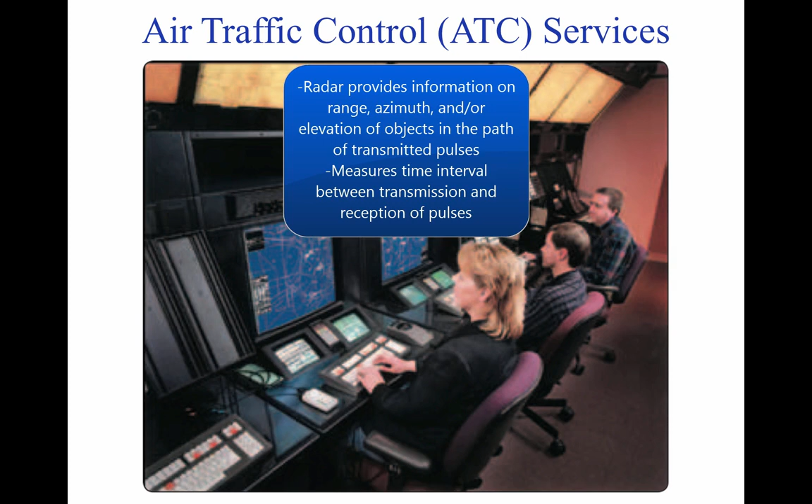Range is determined by measuring the time it takes for the radio wave to go out to the object and then return to the receiving antenna. The direction of a detected object from a radar site is determined by the position of the rotating antenna when the reflected portion of the radio wave is received. Modern radar is very reliable and there are seldom outages. This is due to reliable maintenance and improved equipment.

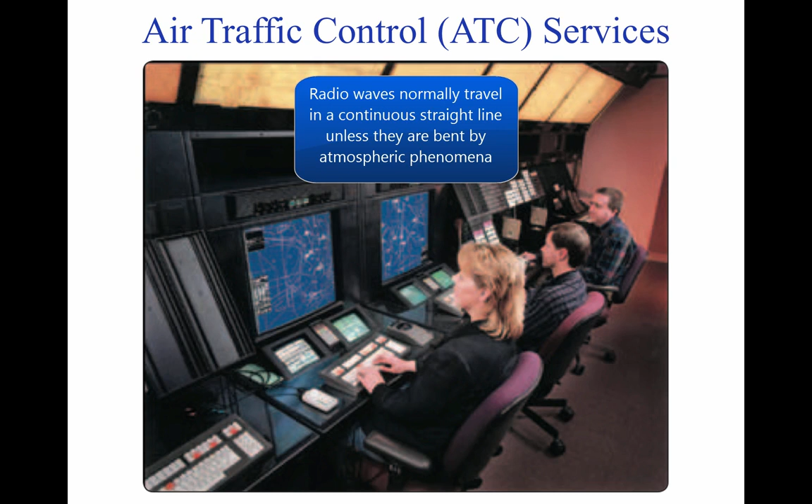There are, however, some limitations which may affect ATC services and prevent a controller from issuing advisories concerning aircraft which are not under his or her control and cannot be seen on radar. The characteristics of radio waves are such that they normally travel in a continuous straight line unless they are bent by atmospheric phenomena such as temperature inversions, reflected or attenuated by dense objects such as heavy clouds and precipitation, or screened by high terrain features.

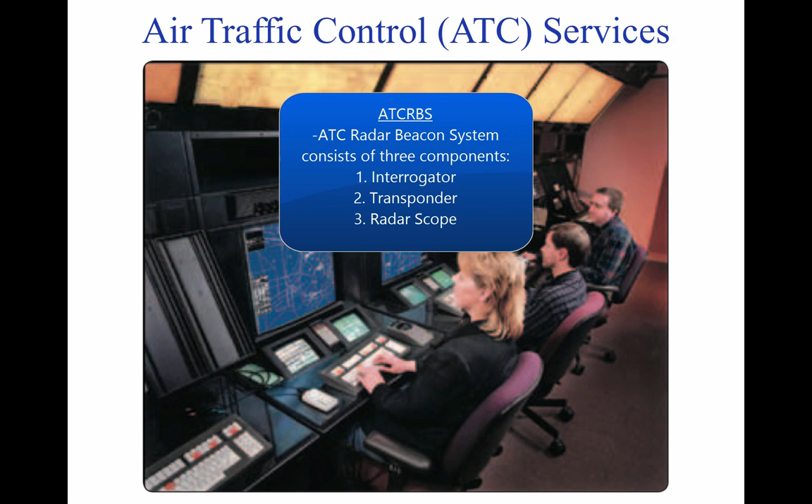ATC Radar Beacon System, ATC-RBS. The ATC Radar Beacon System, ATC-RBS, is often referred to as secondary surveillance radar. This system consists of 3 components and helps in alleviating some of the limitations associated with primary radar. The 3 components are an interrogator, transponder, and radar scope. The advantages of ATC-RBS are the reinforcement of radar targets, rapid target identification, and a unique display of selected codes.

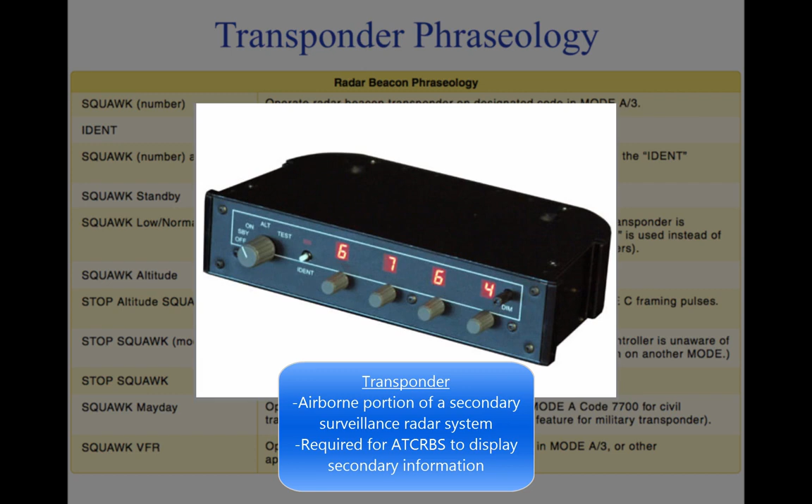Transponder. The transponder is the airborne portion of the secondary surveillance radar system, and a system with which a pilot should be familiar. The ATC-RBS cannot display the secondary information unless an aircraft is equipped with a transponder. A transponder is also required to operate in certain controlled airspace, as discussed in Tutorial 14, Airspace.

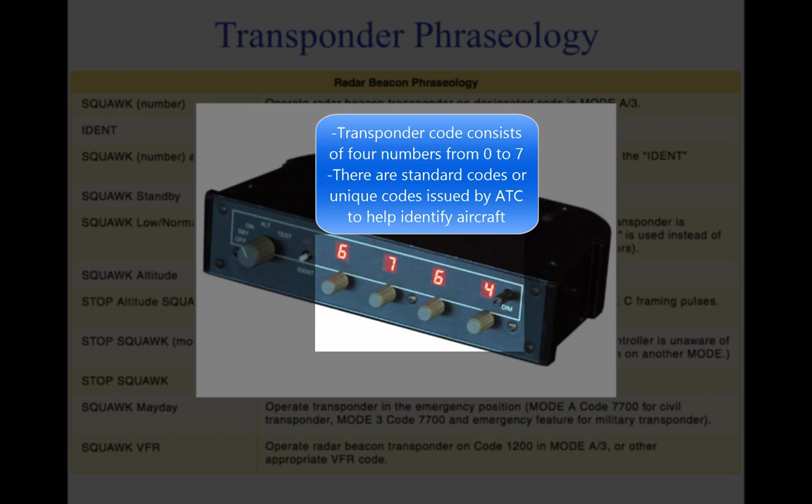A transponder code consists of 4 numbers from 0 to 7, 4,096 possible codes. There are some standard codes, or ATC may issue a 4-digit code to an aircraft. When a controller requests a code or function on the transponder, the word squawk may be used. This figure lists some standard transponder phraseology. Additional information concerning transponder operation can be found in the AIM Chapter 4.

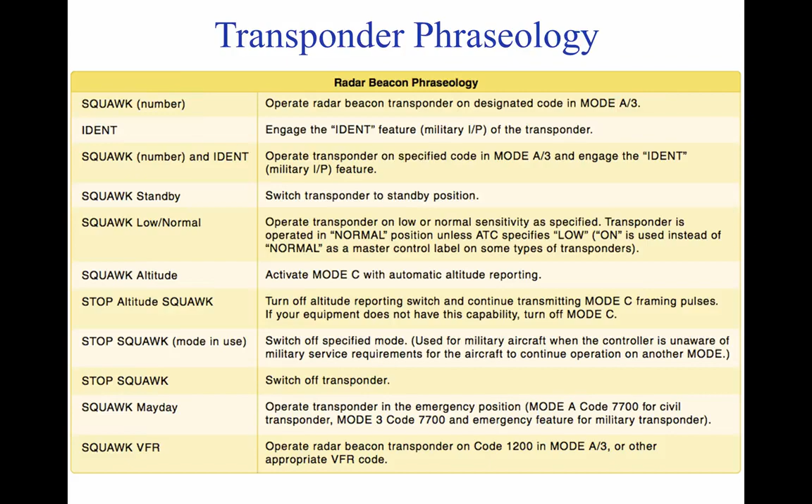Radar Traffic Advisories. Radar-equipped ATC facilities provide radar assistance to aircraft on instrument flight plans, and VFR aircraft provided the aircraft can communicate with the facility and are within radar coverage. This basic service includes safety alerts, traffic advisories, limited vectoring when requested, and sequencing at locations where this procedure has been established. ATC issues traffic advisories based on observed radar targets.

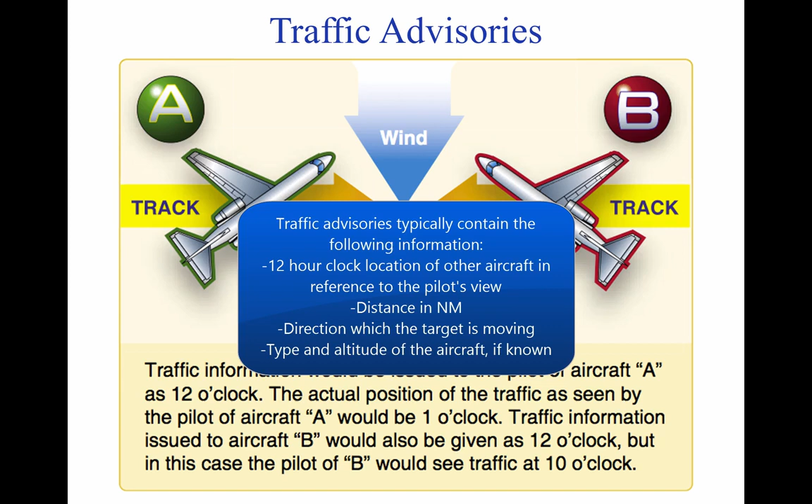The traffic is referenced by azimuth from the aircraft in terms of the 12-hour clock. Also, distance in nautical miles, direction in which the target is moving, and type and altitude of the aircraft, if known, are given. An example would be traffic 10 o'clock, 5 miles eastbound, Cessna 152, 3,000 feet. The pilot should note that traffic position is based on the aircraft track and that wind correction can affect the clock position at which a pilot locates traffic. This service is not intended to relieve the pilot of the responsibility to see and avoid other aircraft.

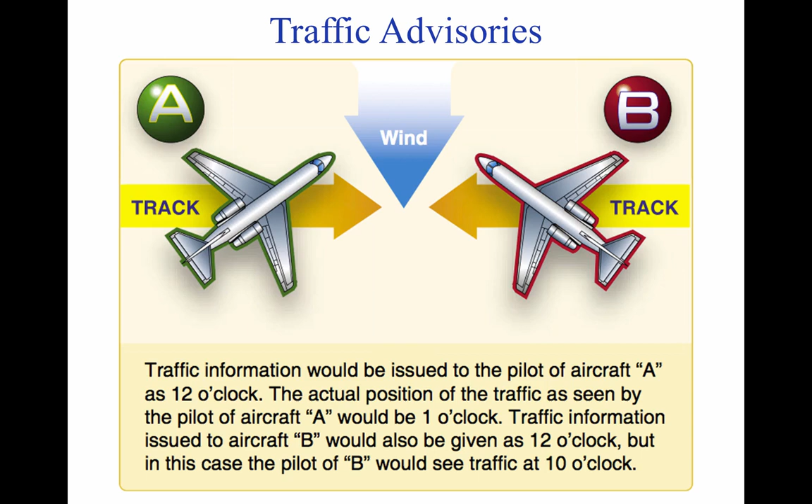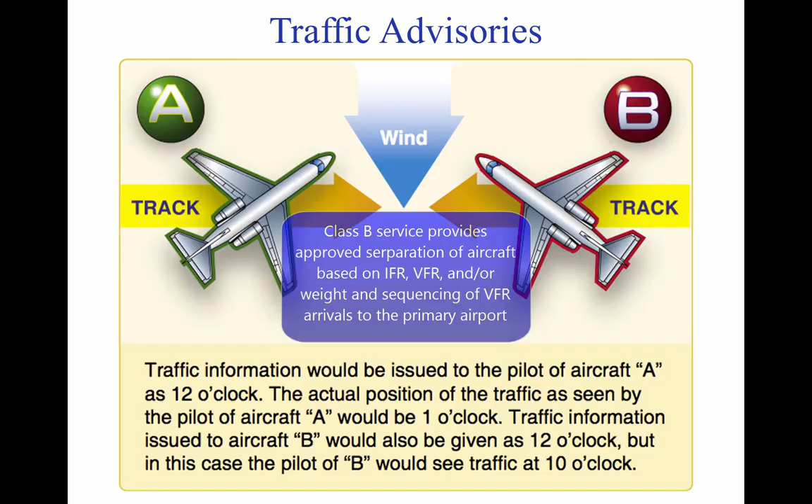In addition to basic radar service, Terminal Radar Service Area, TRSA, has been implemented at certain terminal locations. TRSAs are depicted on sectional aeronautical charts and listed in the AFD. The purpose of this service is to provide separation between all participating VFR aircraft and all IFR aircraft operating within the TRSA. Class C service provides approved separation between IFR and VFR aircraft and sequencing of VFR aircraft to the primary airport. Class B service provides approved separation of aircraft based on IFR, VFR, and/or weight, and sequencing of VFR arrivals to the primary airport.

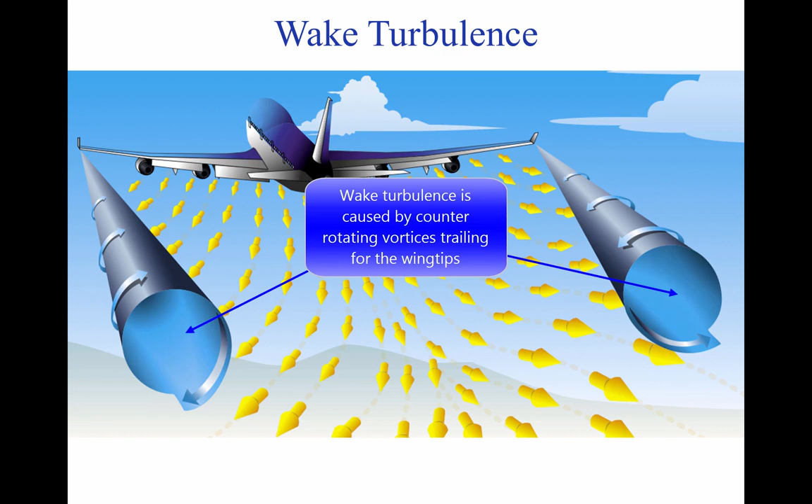Wake turbulence. All aircraft generate wake turbulence while in flight. This disturbance is caused by a pair of counter-rotating vortices trailing from the wingtips. The vortices from larger aircraft pose problems to encountering aircraft. The wake of these aircraft can impose rolling moments exceeding the roll control authority of the encountering aircraft.

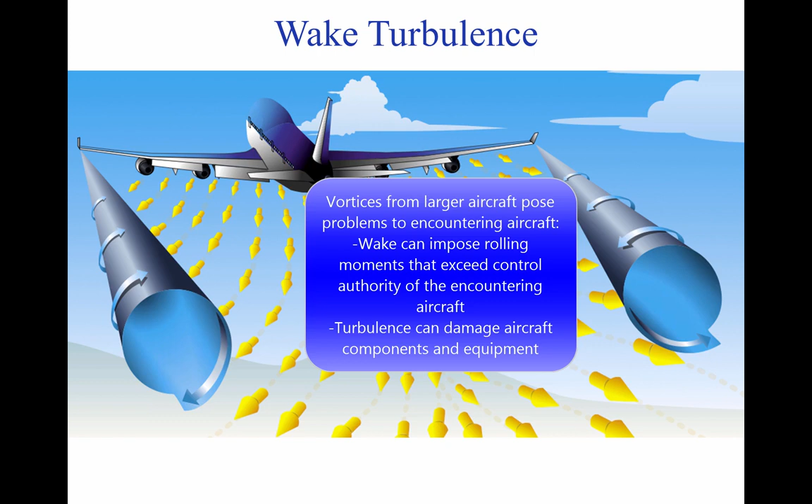The turbulence generated within the vortices can damage aircraft components and equipment if encountered at close range. For this reason, a pilot must envision the location of the vortex wake and adjust the flight path accordingly.

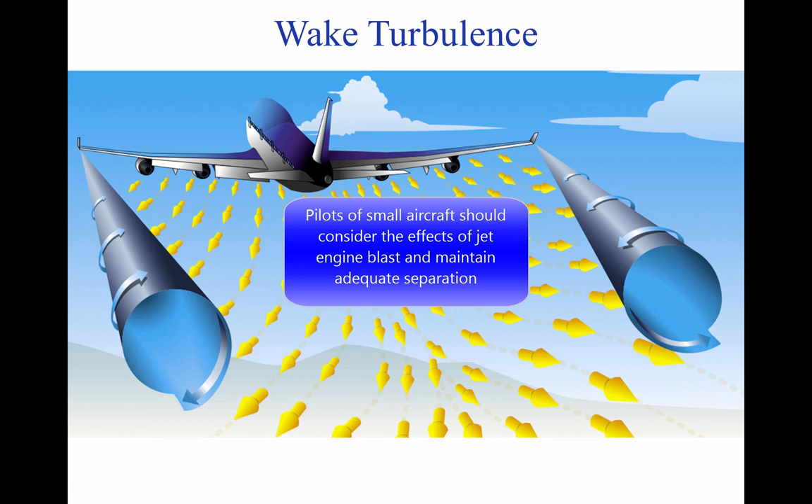During ground operations and takeoff, jet engine blast, or thrust stream turbulence, can cause damage and upset smaller aircraft at close range. For this reason, pilots of small aircraft should consider the effects of jet engine blast and maintain adequate separation. Pilots of larger aircraft should also consider the effects of their aircraft's jet engine blast on other aircraft and equipment on the ground.

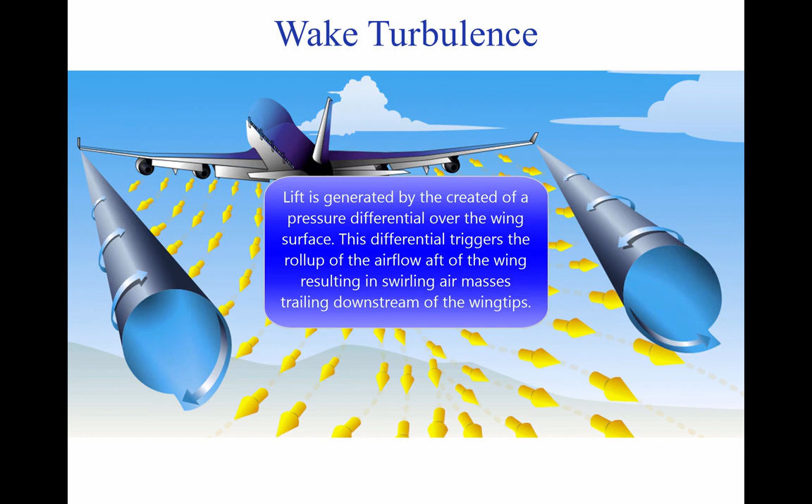Vortex generation: Lift is generated by the creation of a pressure differential over the wing surface. The lowest pressure occurs over the upper wing surface and the highest pressure under the wing. This pressure differential triggers the roll-up of the airflow aft of the wing, resulting in swirling air masses trailing downstream of the wingtips. After the roll-up is completed, the wake consists of two counter-rotating cylindrical vortices.

Most of the energy is within a few feet of the center of each vortex, but pilots should avoid a region within about 100 feet of the vortex core.

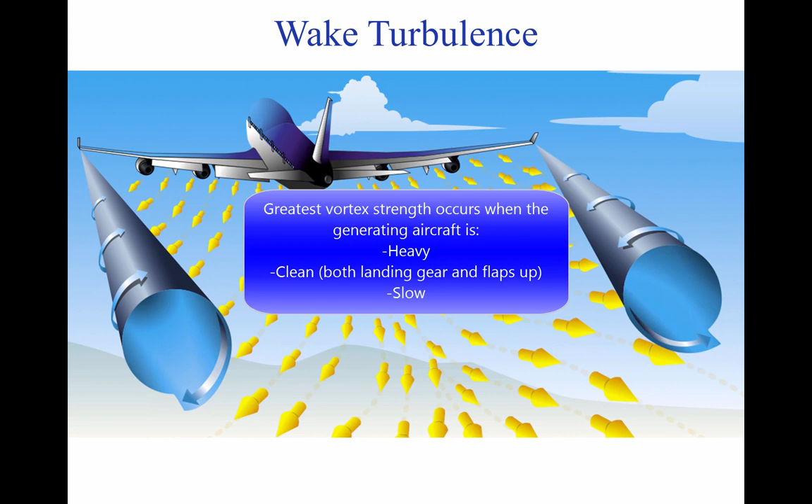Vortex strength: The strength of the vortex is governed by the weight, speed, and shape of the wing of the generating aircraft. The vortex characteristics of any given aircraft can also be changed by the extension of flaps or other wing configuration devices, as well as by a change in speed. The greatest vortex strength occurs when the generating aircraft is heavy, clean, and slow.

Vortex behavior: Trailing vortices have certain behavioral characteristics that can help a pilot visualize the wake location and take avoidance precautions. Vortices are generated from the moment an aircraft leaves the ground until it touches down, since trailing vortices are the byproduct of wing lift.

The vortex circulation is outward, upward, and around the wingtips when viewed from either ahead or behind the aircraft. Tests have shown that vortices remain spaced a bit less than a wingspan apart, drifting with the wind, at altitudes greater than a wingspan from the ground.

Tests have also shown that the vortices sink at a rate of several hundred feet per minute, slowing their descent and diminishing in strength with time and distance behind the generating aircraft.

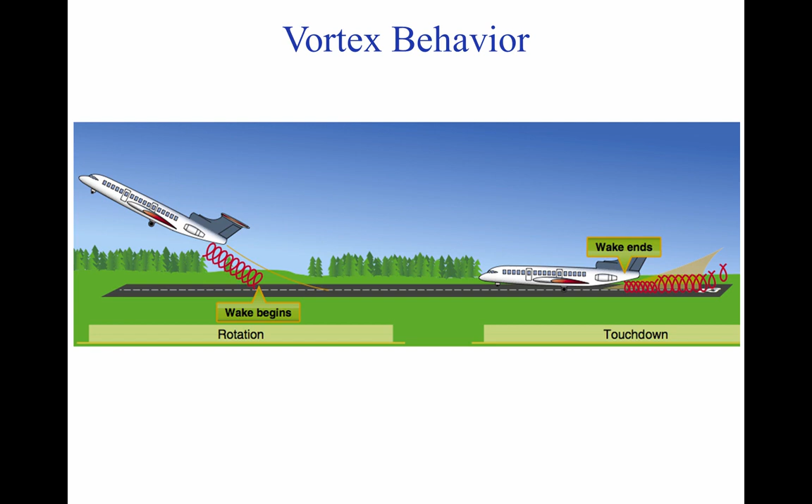When the vortices of larger aircraft sink close to the ground, within 100 to 200 feet, they tend to move laterally over the ground at a speed of 2 to 3 knots. A crosswind decreases the lateral movement of the upwind vortex and increases the movement of the downwind vortex. A tailwind condition can move the vortices of the preceding aircraft forward into the touchdown zone.

Vortex avoidance procedures. Landing behind a larger aircraft on the same runway: stay at or above the larger aircraft's approach flight path and land beyond its touchdown point.

Landing behind a larger aircraft on a parallel runway closer than 2,500 feet: consider the possibility of drift and stay at or above the larger aircraft's final approach flight path and note its touchdown point.

Landing behind a larger aircraft on a crossing runway: cross above the larger aircraft's flight path.

Landing behind a departing aircraft on the same runway: land prior to the departing aircraft's rotation point. Landing behind a departing aircraft on a crossing runway: note the aircraft's rotation point and, if that point is past the intersection, continue and land prior to the intersection.

If the larger aircraft rotates prior to the intersection, avoid flight below its flight path. Abandon the approach unless a landing is ensured well before reaching the intersection.

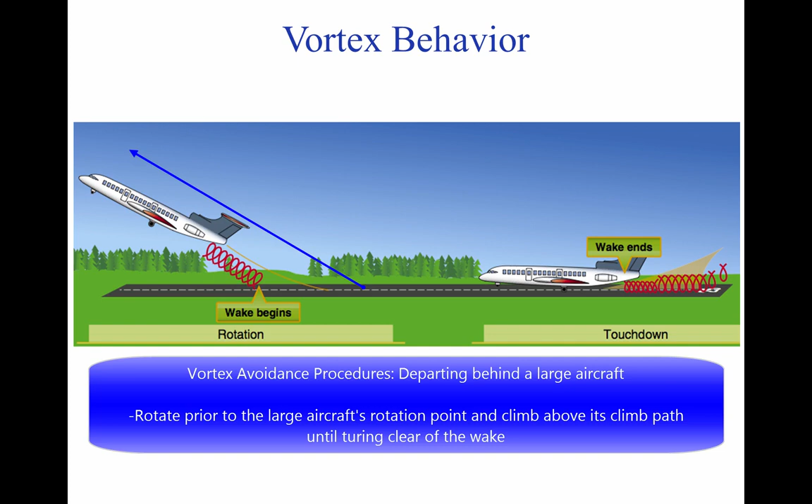Departing behind a large aircraft: rotate prior to the large aircraft's rotation point and climb above its climb path until turning clear of the wake.

For intersection takeoffs on the same runway, be alert to adjacent larger aircraft operations, particularly upwind of the runway of intended use. If an intersection takeoff clearance is received, avoid headings that cross below the larger aircraft's path.

If departing or landing after a large aircraft executing a low approach, missed approach, or touch-and-go landing, since vortices settle and move laterally near the ground, the vortex hazard may exist along the runway and in the flight path, particularly in a quartering tailwind. It is prudent to wait at least 2 minutes prior to a takeoff or landing.

En route, it is advisable to avoid a path below and behind a large aircraft, and if a large aircraft is observed above on the same track, change the aircraft's position laterally and preferably upwind.

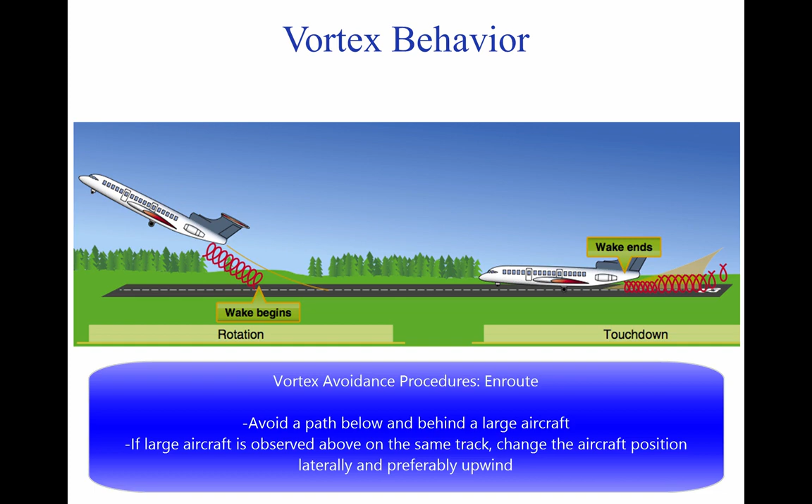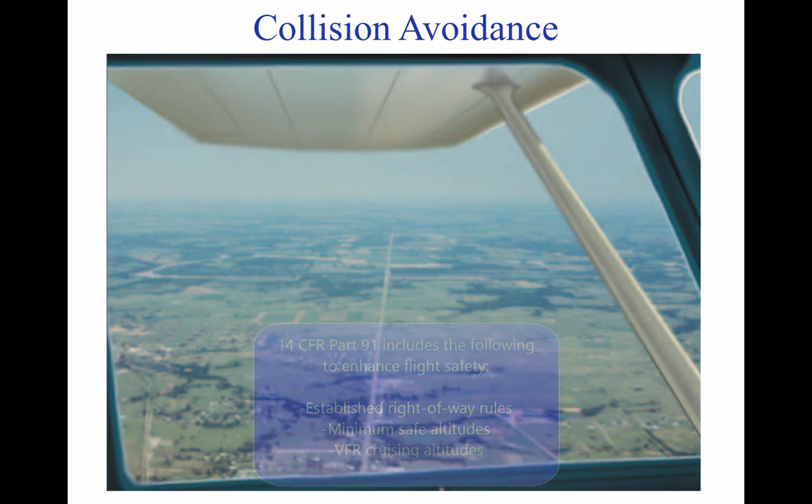Collision avoidance. 14 CFR Part 91 has established right-of-way rules, minimum safe altitudes, and VFR cruising altitudes to enhance flight safety. The pilot can contribute to collision avoidance by being alert and scanning for other aircraft. This is particularly important in the vicinity of an airport.

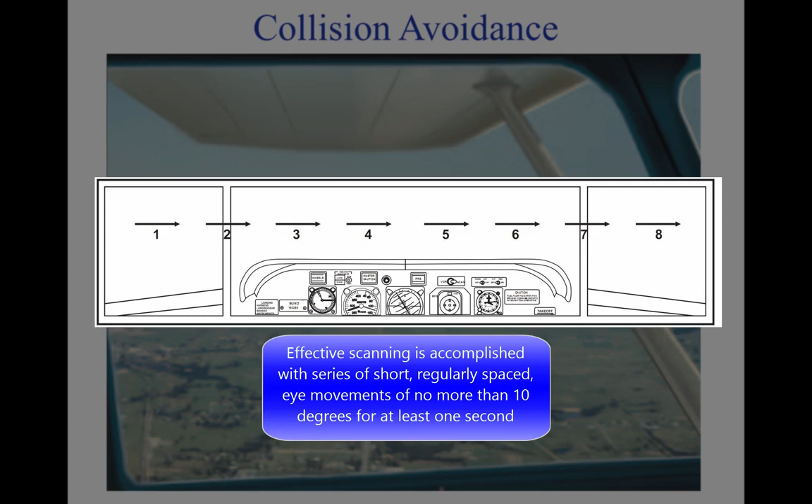Effective scanning is accomplished with a series of short, regularly spaced eye movements that bring successive areas of the sky into the central visual field. Each movement should not exceed 10 degrees, and each should be observed for at least 1 second to enable detection. Although back-and-forth eye movements seem preferred by most pilots, each pilot should develop a scanning pattern that is most comfortable and adhere to it to assure optimum scanning. Even if entitled to the right-of-way, a pilot should yield if another aircraft seems too close.

Clearing procedures. The following procedures and considerations should assist a pilot in collision avoidance under various situations. Before takeoff, prior to taxiing onto a runway or landing area in preparation for takeoff, pilots should scan the approach area for possible landing traffic, executing appropriate maneuvers to provide a clear view of the approach areas.

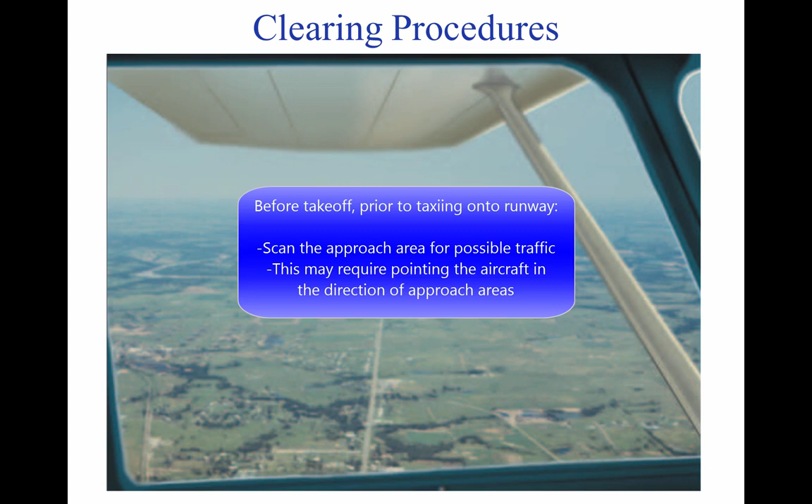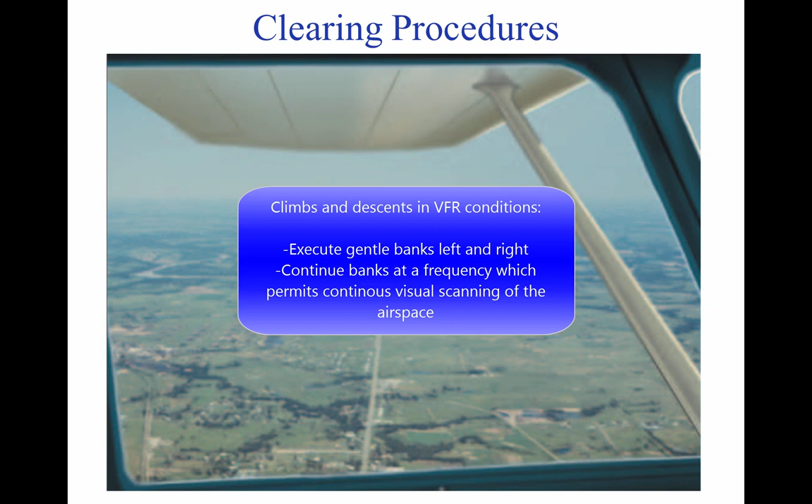Climbs and descents. During climbs and descents in flight conditions which permit visual detection of other traffic, pilots should execute gentle banks left and right at a frequency which permits continuous visual scanning of the airspace.

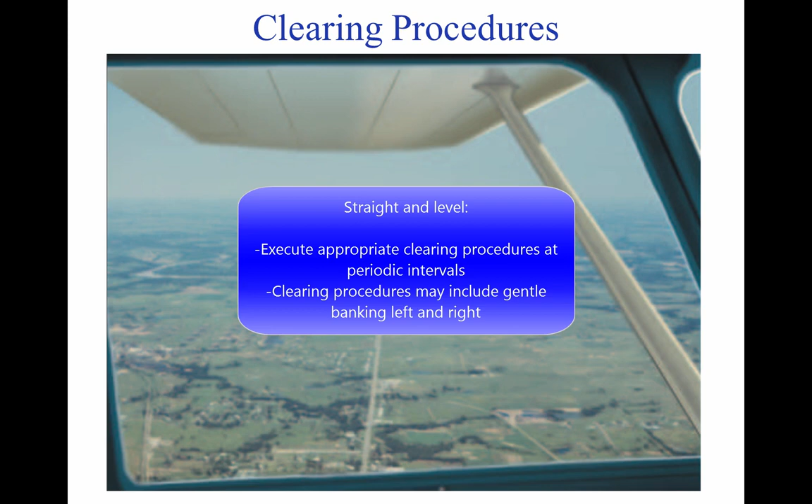Straight and level. During sustained periods of straight and level flight, a pilot should execute appropriate clearing procedures at periodic intervals. Traffic patterns. Entries into traffic patterns while descending should be avoided. Traffic at VOR sites. Due to converging traffic, sustained vigilance should be maintained in the vicinity of VORs and intersections.

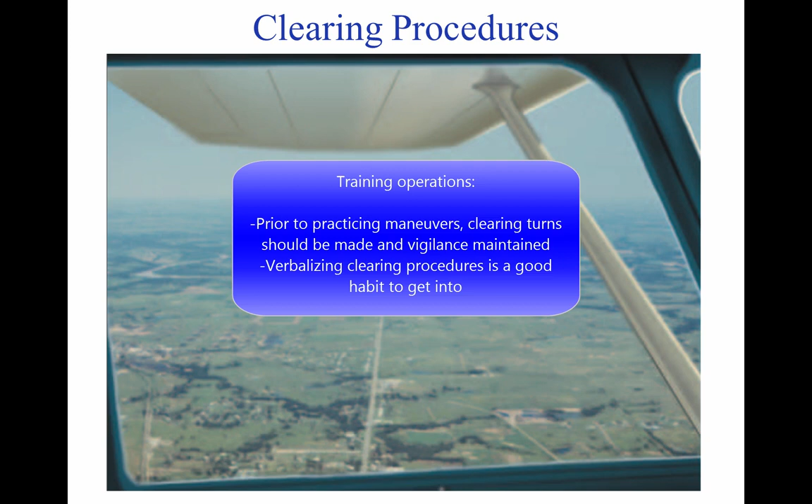Training operations. Vigilance should be maintained and clearing turns should be made prior to a practice maneuver. During instruction, the pilot should be asked to verbalize the clearing procedures, calling out clear left, right, above, and below.

High-wing and low-wing aircraft have their respective blind spots. The pilot of a high-wing aircraft should momentarily raise the wing in the direction of the intended turn and look for traffic prior to commencing the turn. The pilot of a low-wing aircraft should momentarily lower the wing and look for traffic prior to commencing the turn.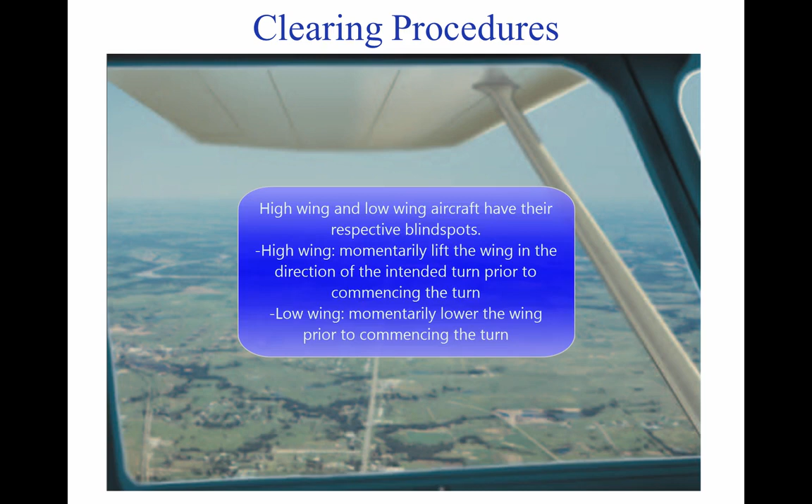Runway incursion avoidance. A runway incursion is any occurrence in the airport runway environment involving an aircraft, vehicle, person, or object on the ground that creates a collision hazard or results in a loss of required separation with an aircraft taking off, intending to take off, landing, or intending to land.

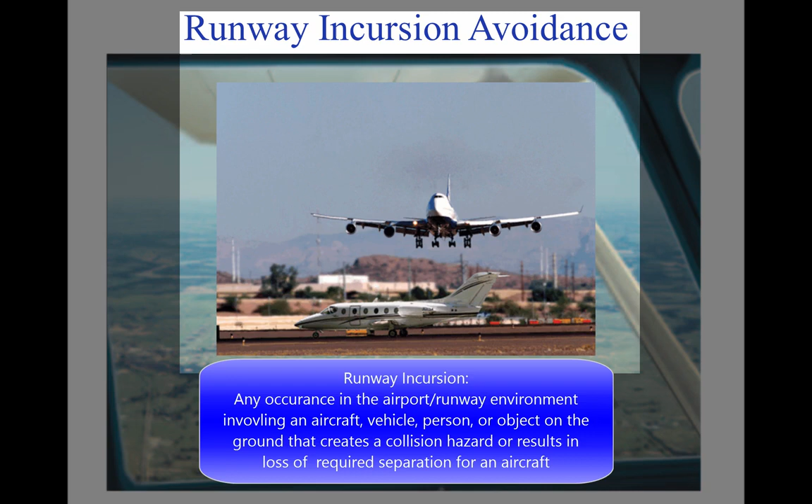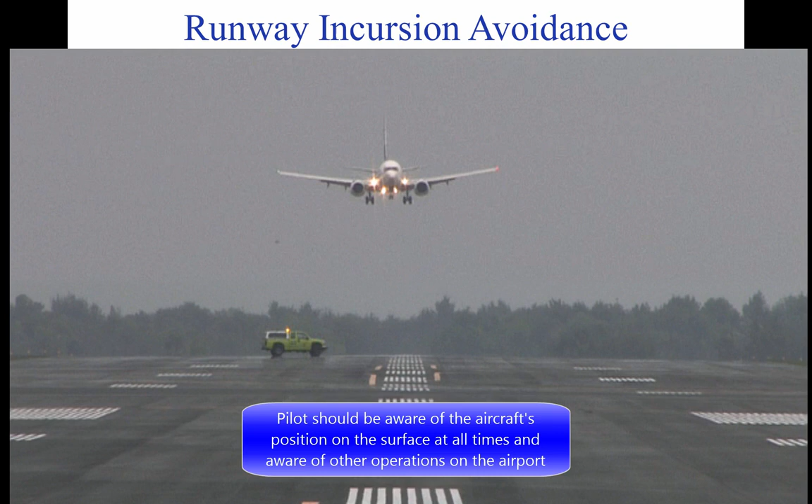It is important to give the same attention to operating on the surface as in other phases of flight. Proper planning can prevent runway incursions and the possibility of a ground collision. A pilot should be aware of the aircraft's position on the surface at all times and be aware of other aircraft and vehicle operations on the airport.

At times, towered airports can be busy and taxi instructions complex. In this situation, it may be advisable to write down taxi instructions. The following are some practices to help prevent a runway incursion.

Read back all runway crossing and/or hold instructions. Review airport layouts as part of pre-flight planning, before descending to land, and while taxiing as needed. Know airport signage. Review NOTAMs for information on runway and taxiway closures and construction areas. Request progressive taxi instructions from ATC when unsure of the taxi route.

Check for traffic before crossing any runway hold line and before entering a taxiway. Turn on aircraft lights and the rotating beacon or strobe lights while taxiing. When landing, clear the active runway as soon as possible, then wait for taxi instructions before further movement. Study and use proper phraseology in order to understand and respond to ground control instructions. Write down complex taxi instructions at unfamiliar airports.

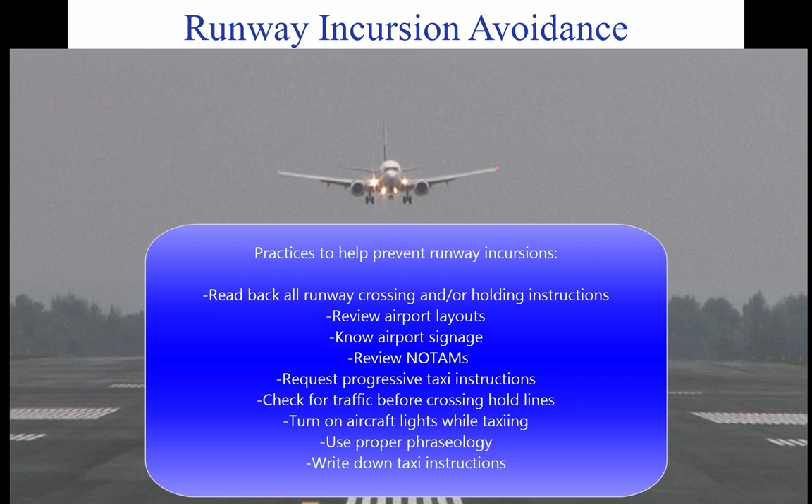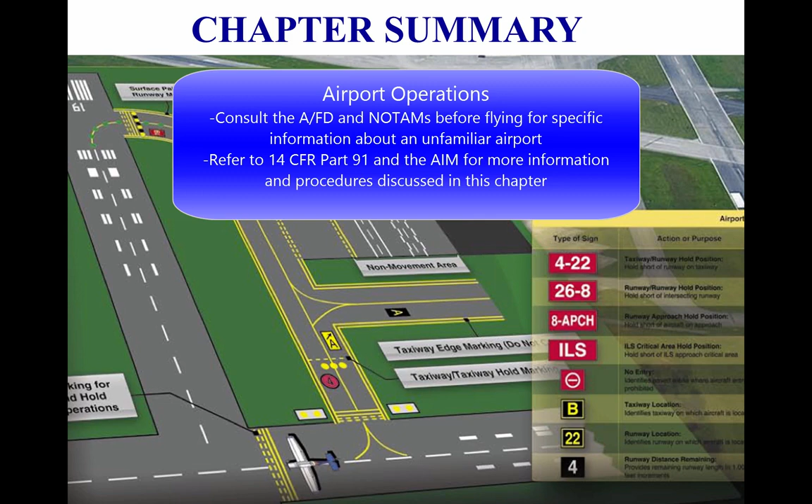For specific information about an unfamiliar airport, consult the AFD and NOTAMs before flying. For further information regarding procedures discussed in this chapter, refer to 14 CFR Part 91 and the AIM. By adhering to established procedures, both airport operations and safety are enhanced.